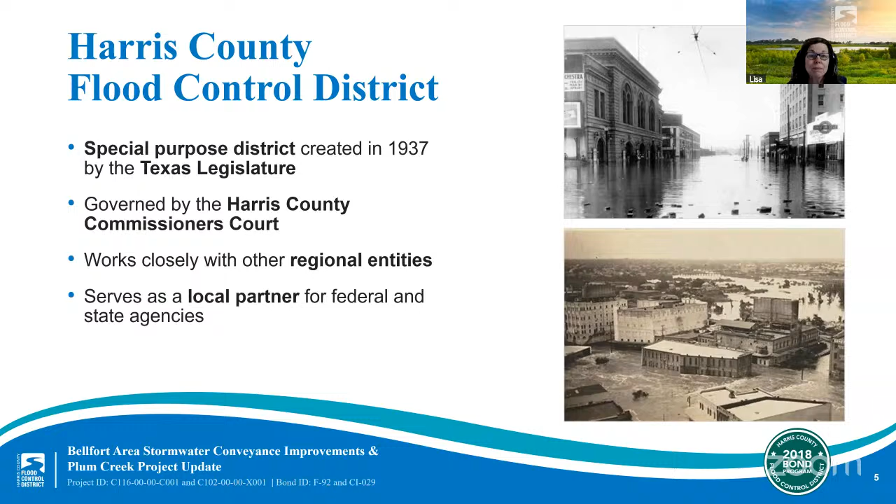The Flood Control District is unique in its mission because we plan and implement new projects that expand and improve our drainage network. And we also have maintenance teams working daily to keep our bayous and channels ready when the next storm hits. In fact, it's built into our mission to plan, implement, and maintain flood risk reduction projects that are guided by community and natural values. That last part, guided by community and natural values, is central to who we are as an organization and the work that we do. That's why your input at meetings like this one is so important.

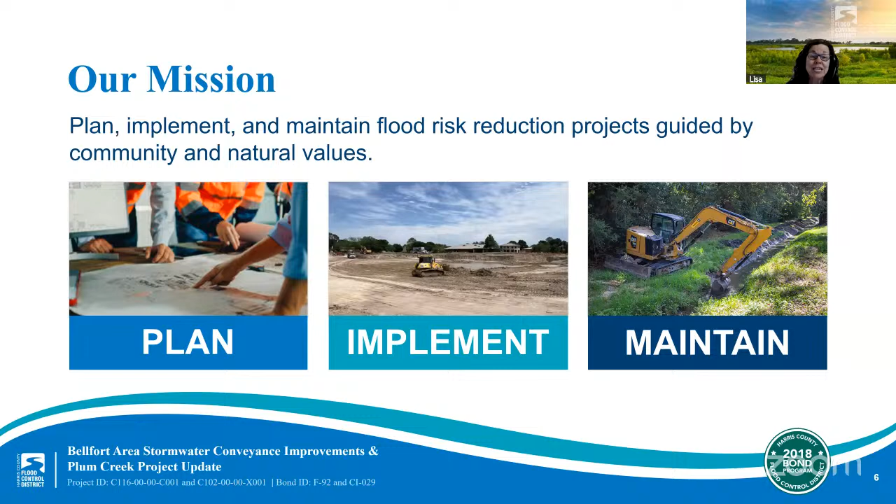I'm sure it's safe to say everyone joining us probably knows Harris County is prone to flooding. We have extreme rainfall events like tropical storms and hurricanes, and our land is flat, which means stormwater often moves slowly when making its way to bayous and channels. Making things a little trickier is that our clay soils don't absorb stormwater very well. So stormwater collects on the ground, creating a pooling effect and increasing the risk of flooding. At the Flood Control District, we know the idea of flooding is a top safety concern for everyone who lives here. It's our job to reduce the risk.

Harris County is comprised of a vast system of bayous, tributaries, and other important waterways making up each watershed. And if you straightened out all of our winding channels and lined them up end to end, they would stretch all the way from the state of New York to the state of California. And that's more than 2,500 linear miles. The projects we're presenting tonight are an important part of the county's drainage network. They're located in the Sims Bayou watershed.

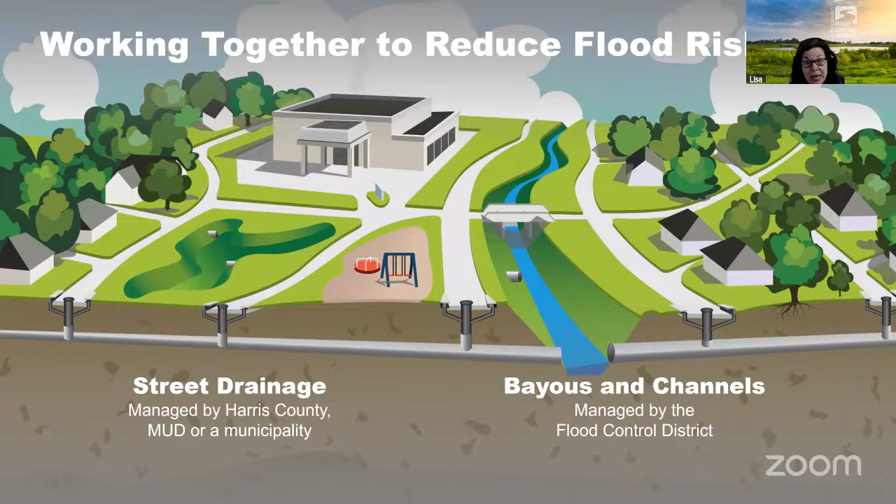We take our role in flood risk reduction for Harris County very seriously, and we leverage different types of funding opportunities for projects that can help reduce the risk of flooding in our region. One important source of funding comes from the 2018 bond program. This program consists of the original $2.5 billion in bond funds that were approved by Harris County voters in 2018, plus an additional $2.7 billion secured through partnerships with 27 unique partners, for a combined total of approximately $5.2 billion for flood risk reduction efforts. Significant progress has been made on the bond program, which has led to remarkable flood risk reduction across Harris County.

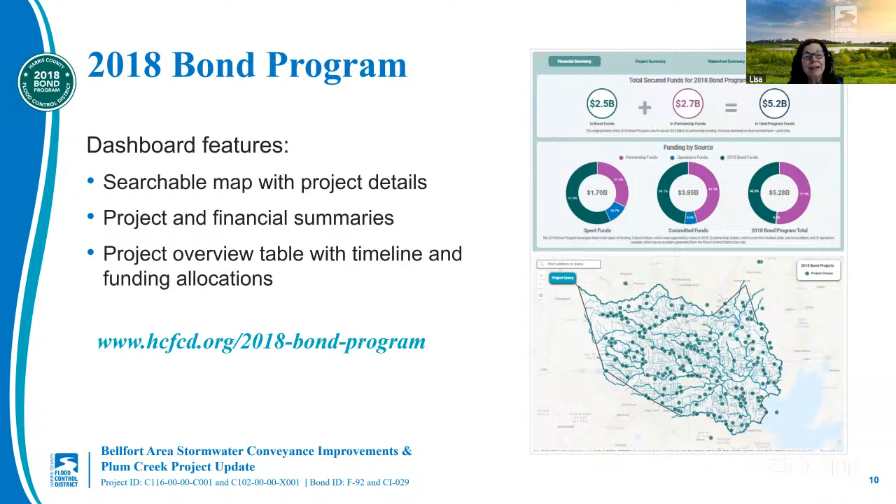It's important to note that even though voters approved $2.5 billion for the 2018 bond program, the estimated total cost of every project on the bond project list is actually much higher than that. Many bond IDs began with feasibility studies or preliminary engineering to help determine what projects were possible and how much they may cost.

So far, we've secured more than $2.7 billion in partner funding to help move projects forward across Harris County. Each funding partner has its own guidelines. For example, some partners fund only certain types of projects, while others ask for a local contribution. The Flood Control District has an experienced and dedicated team that works hard to match each project with the right funding opportunities. This way, every dollar goes further to bring the most benefit to the community.

Now let's take a look at each of the funding sources for these two projects. After voters approved the 2018 bond, the Flood Control District initiated bond IDs F-92 and CI-029. The bond program allocated approximately $14 million for the Bellfort area Stormwater Conveyance Improvement Project and $15 million for the Plum Creek Channel Conveyance Improvement Project.

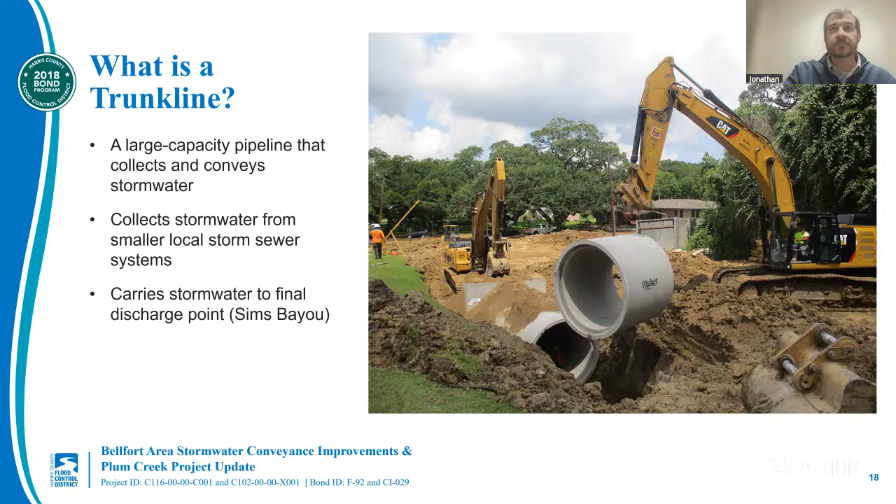3 alternatives were evaluated during the PER stage, or the preliminary engineering stage. Alternative 1 recommends the construction of a 5,070 linear foot, 78-inch reinforced concrete pipe storm sewer, with 8 interconnections to the existing storm sewers at various locations and an outfall into Sims Bayou.

Alternative 2 recommends an 84-inch pipe with similar alignment and components as Alternative 1. And Alternative 3 recommends various sizes between 72-inch and 96-inch pipes with similar alignments and components as Alternative 1.

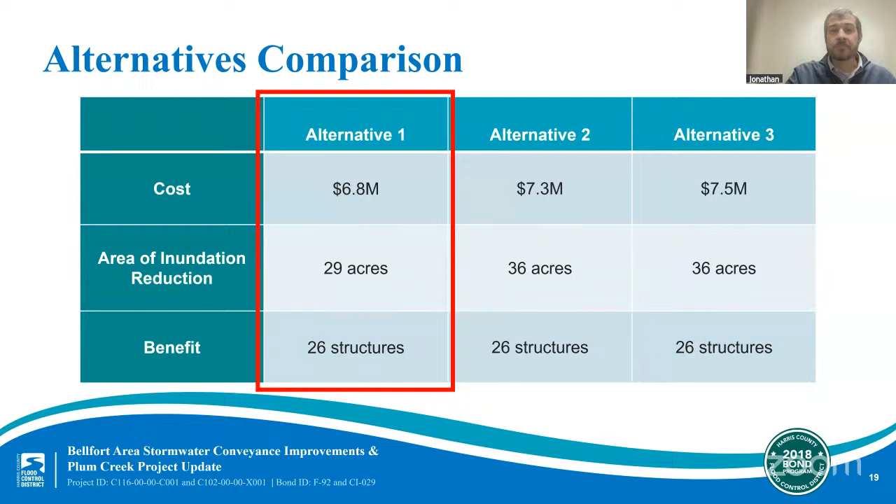Of the 3 options analyzed, Alternative 1 was recommended as the preferred option for reducing the flood risk based on acres, roadway miles, and structures benefited. Alternatives 2 and 3 had higher construction costs with limited additional benefits as compared with the preferred option of Alternative 1.

The trunk line is proposed to be constructed within the existing easements and will improve conveyance in combination with the existing storm sewer. It will cross 2 streets at Richwood Street and Westover Street and include segments along La Paseo Street, Beaudark Street, Kingsway Drive, and Bellfort Avenue.

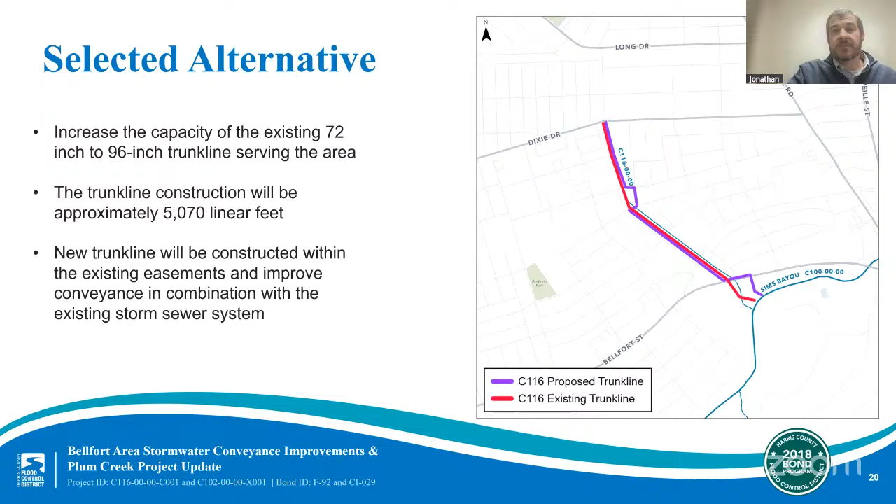Shown on this slide are the existing conditions that necessitated this project. Currently, most of the project area channels, including along the Sims Bayou main stem, have less than a 25-year storm sewer system capacity, which is the amount of stormwater the channel can hold before overtopping its banks.

Flooding of homes and businesses located near where the tributary and main stem connect has occurred numerous times, including flood levels throughout the watershed brought on by Tropical Storm Allison in 2001 and Harvey in 2017. Significant floodplains and residential developments constructed along Sims Bayou decades ago, prior to modern building elevation requirements, have resulted in significant damage during flood events.

So, I want to take a few minutes to cover another term that we mentioned earlier. Throughout the presentation, we'll be using terms like 100-year event and annual chance event, and I'm going to clarify what that means. A 1% annual chance event, or 100-year event, is a rainfall event that has a 1% chance of occurring in any given year.

That doesn't mean if you have a 1% annual chance event this year, you're good for another 100 years. It's just simply a statistical measure of the expected rainfall frequency based on historical averages and data that we've collected.

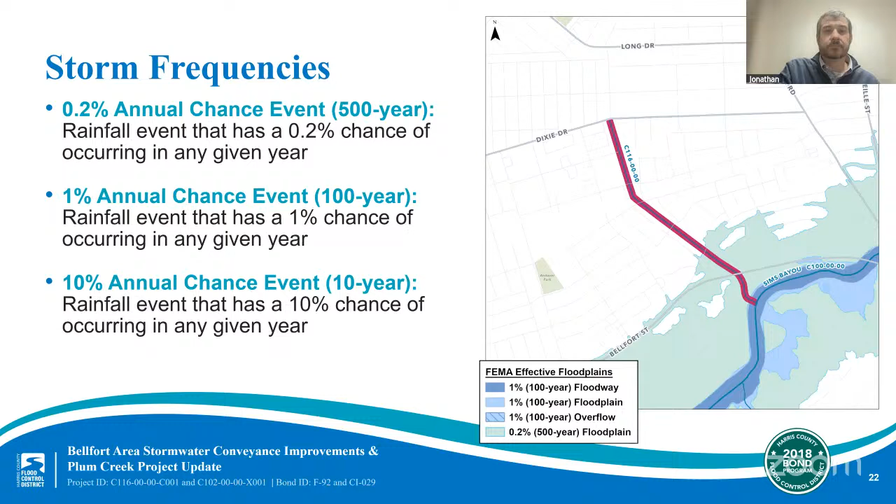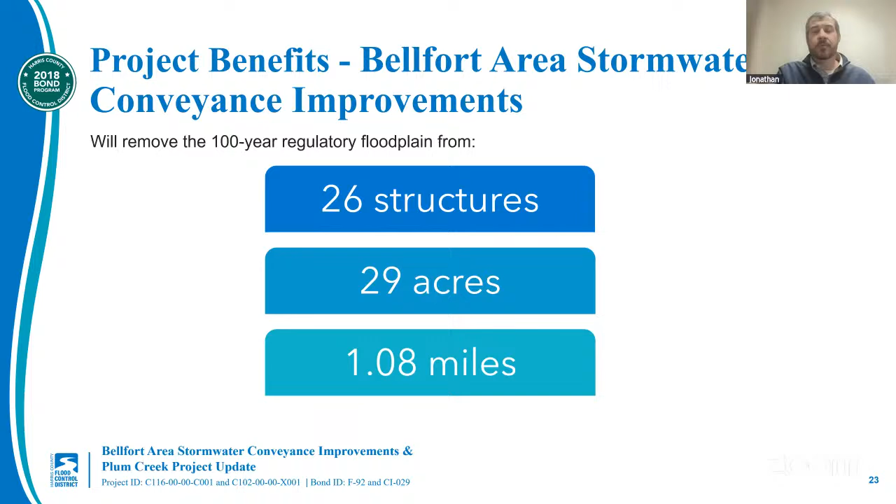Now that I've provided an update on the project and anticipated benefits, let's take a look at the timeline and next steps. When following our project lifecycle, after the PER stage comes the design and then construction stage. We anticipate this project completing its PER stage during the fourth quarter of 2025. The design stage should begin around the first quarter of 2026.

And based on our current timeline, we anticipate construction to start after the completion of final design in the first quarter of 2028. And if everything progresses according to plan, construction could be completed by the first quarter of 2030.

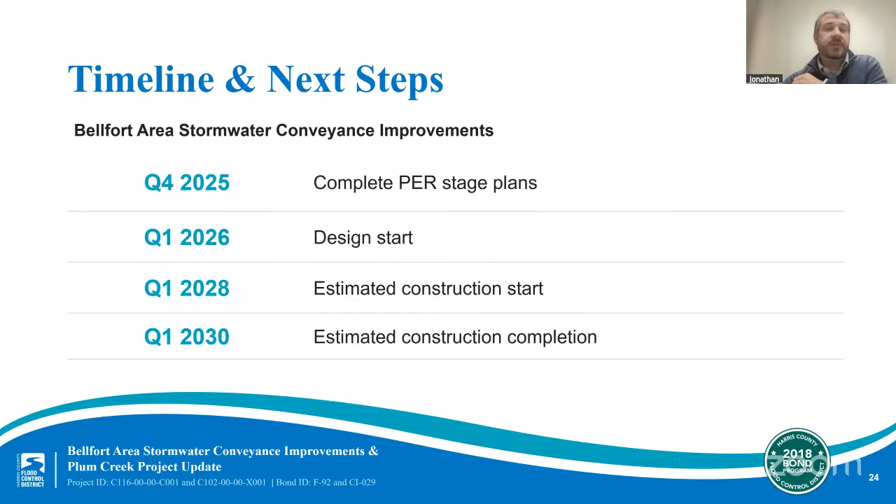The objective of the project is to reconstruct the concrete lined channel to provide greater channel stability while ensuring the proposed modifications do not create adverse impacts to other areas along the channel. Of the 4 options analyzed during the planning stage of this project, Alternative 3 was recommended as the preferred option.

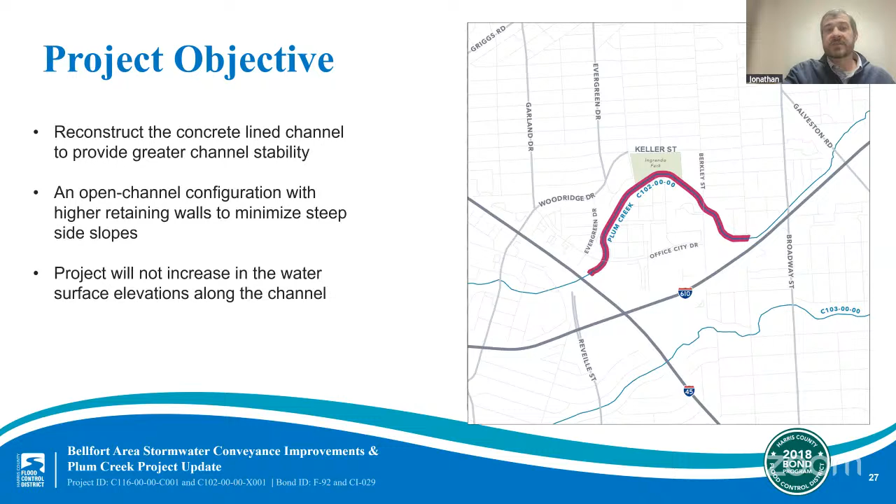However, the 4 options analyzed were all similar in their reconstruction approach, with only slight variations with the channel configurations, heights, and project costs. Alternative 3 consists of an open channel configuration with higher retaining walls to minimize steep side slopes along the channel. The height of the retaining walls varies from 6 feet to 10 feet across the 3 segments, depending on existing ground elevations and design requirements. The recommended alternative does not increase the risk of flooding along the channel.

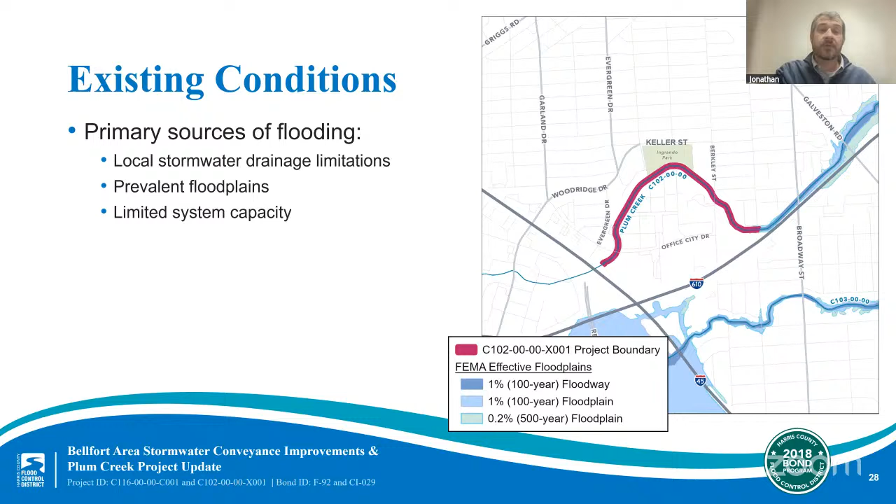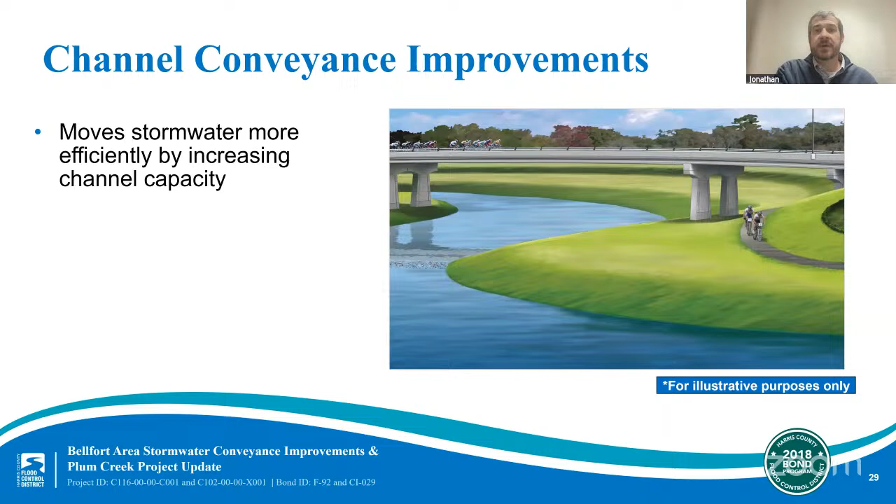So let's quickly define what we call channel conveyance improvements and explain how they help with flood risk reduction. Simply put, channel conveyance improvements are engineered modifications or changes to a waterway that help the channel move more stormwater, especially during heavy rain events. This is usually accomplished by widening or deepening the channel or a combination of both. The Plum Creek Channel Improvements is a rehabilitation project designed to enhance the channel's overall conveyance capacity. Proposed improvements extend alongside the full length of the project, providing greater channel stability throughout the project limits.

And now that I've provided an update on the Plum Creek project and anticipated benefits, let's take a look at the timeline and next steps. When following our project lifecycle, after the PER stage comes the design and then construction stage. We anticipate this project completing its PER stage during the fourth quarter of 2025, and then the design stage should begin around the first quarter of 2026. Based on our current timeline, we anticipate construction to start after the completion of final design in the second quarter of 2027. And if everything progresses according to plan, construction could be completed by the second quarter of 2029.

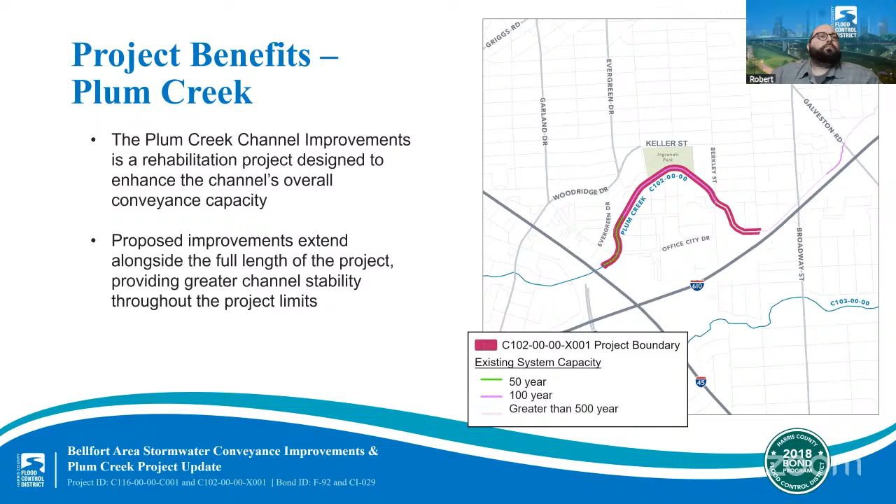Thanks, Jonathan. Our next question is for Emmanuel. Emmanuel, how was this project identified? Thank you so much for that as well. So the Bellfort area project was identified by a planning study in 2022, based on factors such as historical flooding. The original planning study limits were between Mykawa Road and Telephone Road, and between Sims Bayou and Long Drive. This area represents the C116 subwatershed, which is about 400 acres in size.

Now, moving on to the Plum Creek project. This is what we'll term a community input project, and it was identified and recommended by area residents and stakeholders. It was initiated around 2023, and Plum Creek, also known as tributary C102-00-00, is owned and maintained by the City of Houston. Both projects, Plum Creek and the Bellfort area project, are located within the limits of Precinct 2. Thank you, Robert.

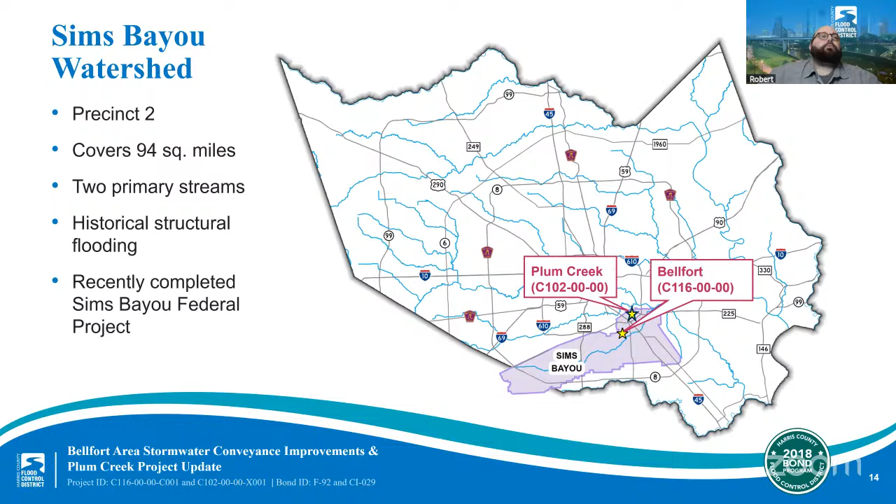Thanks, Emmanuel. Our next question is for Pooja. Pooja, please recap the project for those who may have joined the meeting late by restating the project objectives. Okay, sure. The objective of the Bellfort area stormwater conveyance improvement project is to reduce the risk of flooding around Bellfort Street.

Now you can see the screen.

My apologies. Bellfort Street area, that is a C116 subwatershed, by constructing a parallel storm sewer trunk line to increase the capacity of the existing drainage system. On the other hand, there is a Plum Creek project. The objective is to reconstruct the concrete-lined channels to provide greater channel stability, while ensuring the proposed modifications do not create adverse impact to other neighborhoods along the channel.

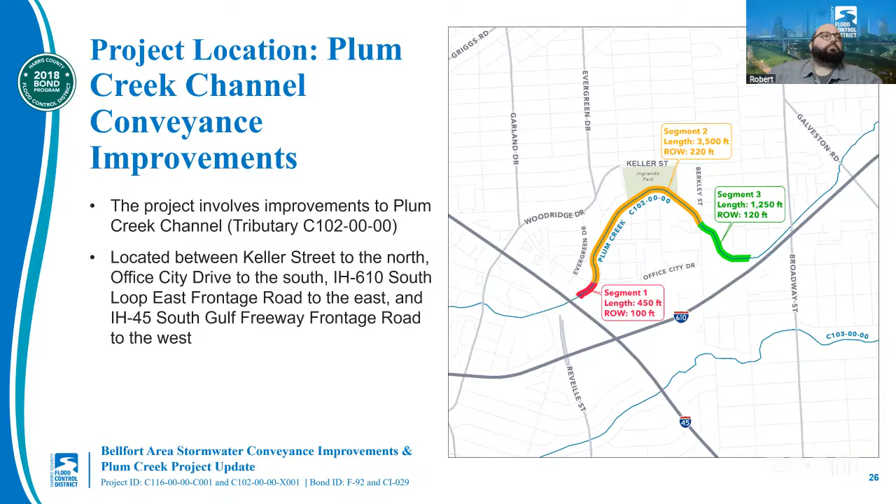All right, thank you, Pooja. Our next question is for Hanny. Hanny, this was also touched on during the presentation, but can you please talk a bit more about the funding sources for this project? Yes, sure. These projects are an example of how we fund projects with multiple funding sources. Often when we look to find funding sources, we have to seek multiple partners to match each project with the right funding opportunities. This way, every dollar goes further to bring the most benefit to the community.

The 2018 bond program allocated $13.6 million for the Bellfort project and $15 million for the Plum Creek project. The City of Houston partnered with us on the Plum Creek project and provided $10 million. The current estimated total project budget for the Bellfort area stormwater conveyance improvement project is approximately $13.6 million, and the total project budget for Plum Creek is approximately $25 million.

All right, thanks, Hanny. Our next question is for Pooja. Pooja, what happens during design, and why do we need to do more engineering work versus just starting construction? Yeah, thank you, Robert. So, once the recommended alternative is selected in a PER, we initiate design services. In design, we do a detailed analysis of the selected alternative. For example, if the project needs right-of-way to build the drainage projects, we start the process of acquiring the land.

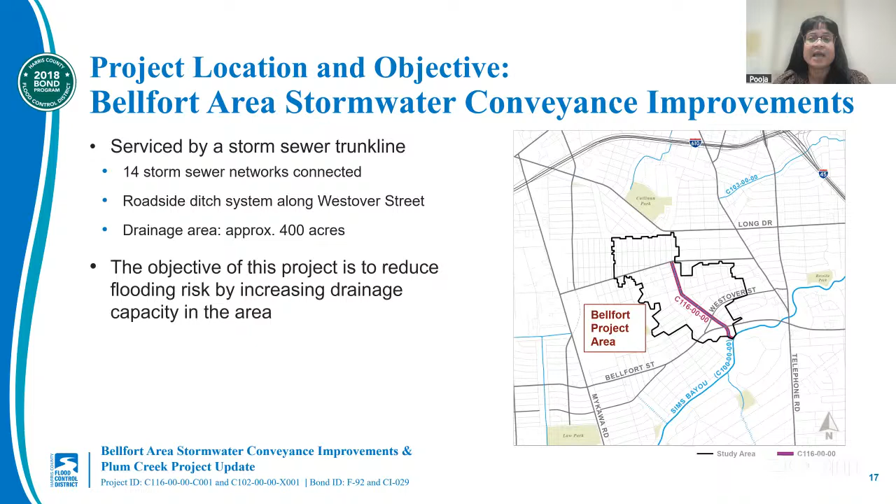All right, thanks, Pooja. Our last question for this evening is for Jonathan. Jonathan, how can I or anybody get a job with the Flood Control District? I can put in a good word for you, Robert.

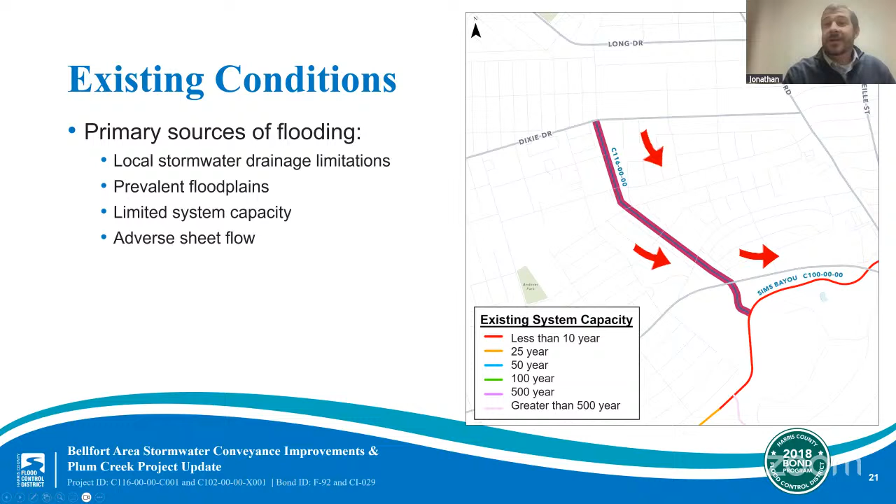No, I think if you go to our website, hcfcd.org, there should be a button on our homepage that says "Work with Us," and that'll bring you right to the page where we've got our openings. We've got a good little list of openings, and we'd love to have anybody who is ready and willing to work for our organization to help reduce flood risk across Harris County. We really have a lot going on, and we're looking for good folks to work with us.